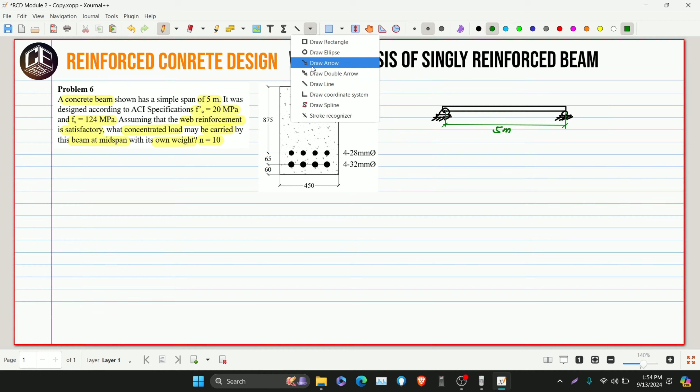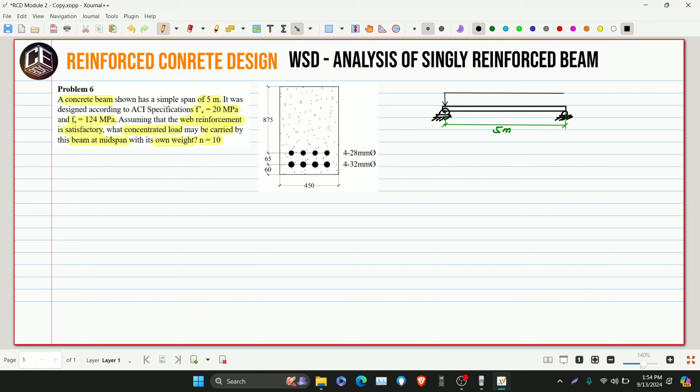Then we have our own weight, which is a distributed load. There's also a concentrated load applied at the center. So this is our load, let's say this load is load P. And this is our W naught, which is the weight of the beam. Let's say this is point A and this is point B.

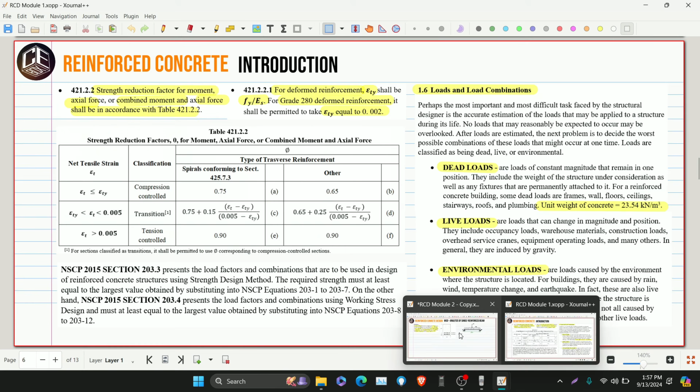So let's get our W naught. If we go back to our module 1, the introduction of reinforced concrete, the unit weight of our reinforced concrete is 23.54 kilonewton per meter cube, so that's what we'll use. Others use exactly 24, so it seems they also rounded off.

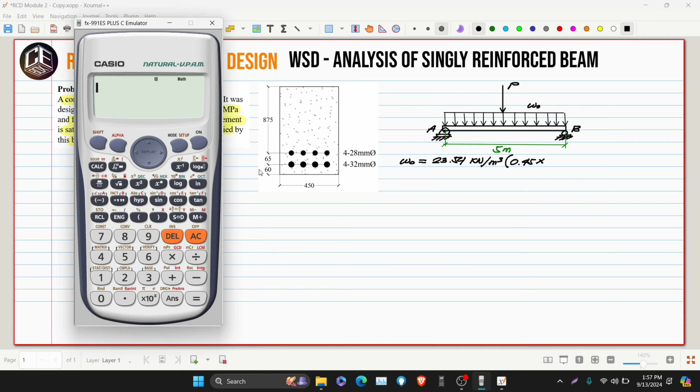Our W naught needs to be in kilonewton per meter, so we need to multiply it by the area, the cross-sectional area of our beam. So our cross-section is 0.45 by, let's see, the overall depth: 0.875 plus 0.065 plus 0.06, so this is 1 meter. This is meter squared since it's area, cancel the meter squared, so what's left is meter.

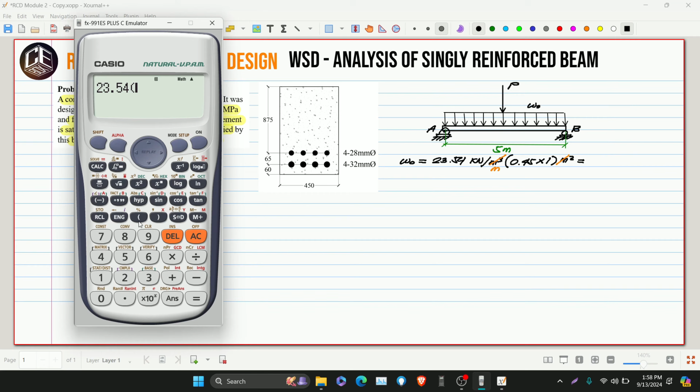So this is 23.54 multiplied by 0.45 times 1, giving 10.593, or 10.59 kilonewton per meter. So now we have our W naught.

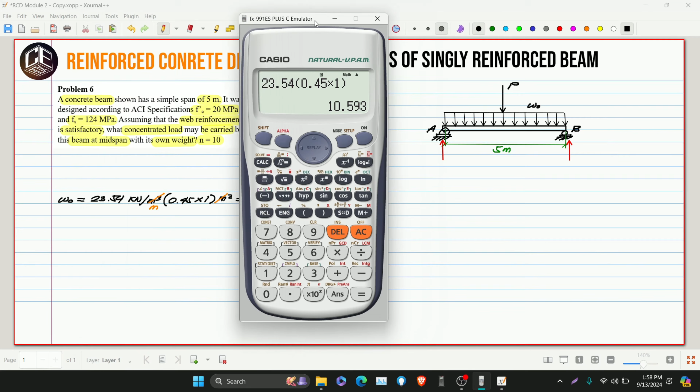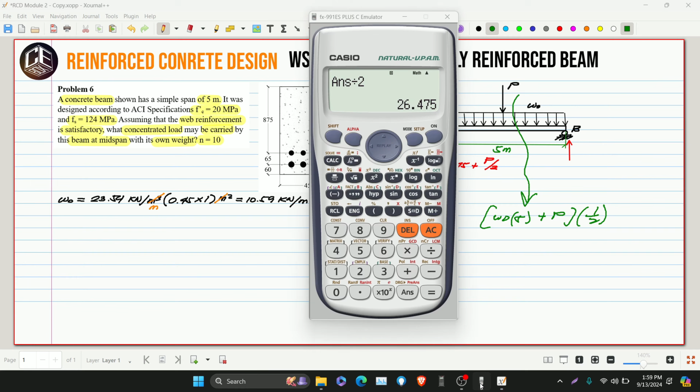That is W naught, 10.593 or 10.59, multiplied by 5, that's our total resultant. Then divide by 2, so our reaction is 26.475 plus P over 2. Because the total result is W naught multiplied by 5 meters then plus P, then divided by 2, so that's correct, giving P over 2. That's our reaction.

Now that we have the reaction, we can get the shear and moment diagram of the beam. For shear, our reaction here is 24.475 plus P over 2, then minus, okay this is at the center, so L over 2, that is 2.5. Sorry, 26.475, that's it.

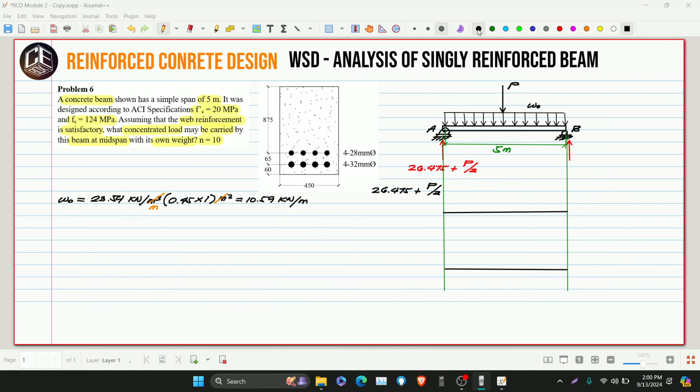So 26.475 then minus W naught, which is 10.59 multiplied by 2.5 meters, so that's 0. So this is it. Then minus W naught, the whole thing, minus W naught multiplied by 2.5, so these just cancel out.

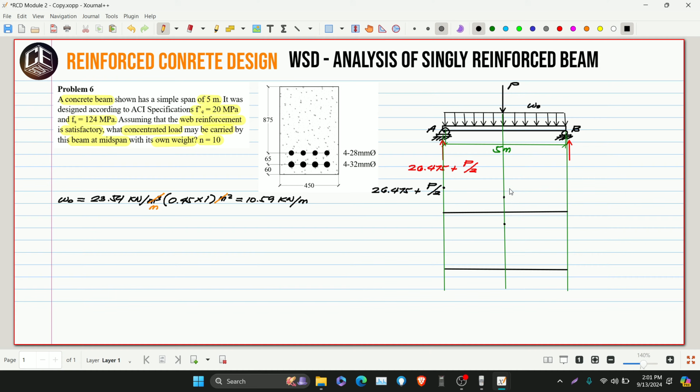Then what's left for us is P over 2. Where is P over 2? At the center. So P over 2, then P over 2, that is 0.5, then minus P, so that's 1, so that is negative 0.5. So this is P over 2, and this is negative P over 2.

And negative P over 2 minus W naught, 10.59, negative 10.59 multiplied by 2.5. So our answer here is negative 26.475 minus P over 2. That's part of the equation too. What happens here? Then minus W naught multiplied by 2.5, the answer is negative 26.475 minus P over 2. That's our answer here. So let's open this up, make it a negative sign.

Negative 26.475 minus P over 2 plus the reaction at support B. So, our shear diagram will close.

This is 0 degree to first degree. Then it goes down, 0 degree to first degree.

Now, what about our moment? We'll simply use the area method. We need to get this area, which is a trapezoid. So this is 1/2 of...

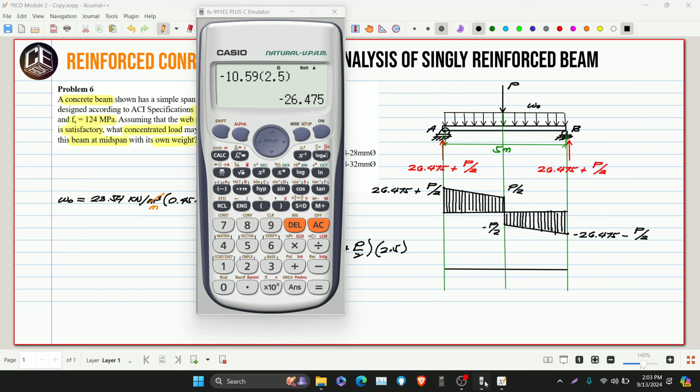26.475 plus P over 2, then plus P over 2, multiplied by 2.5. That's our area. So this is 2.5 times 26.475 over 2.

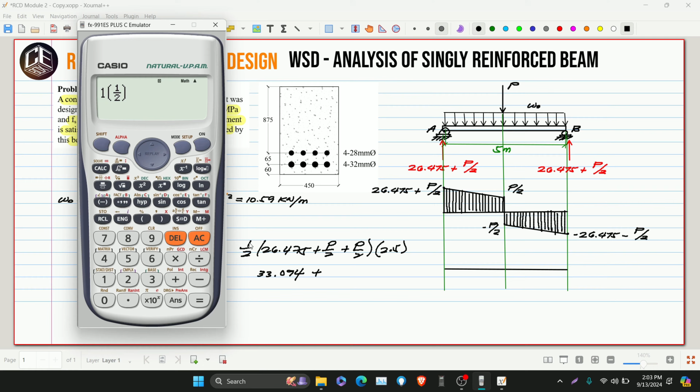So this is 33.094. Then plus P over 2 plus P over 2 is 1 multiplied by 1/2, then multiplied by 2.5. So this is 1.25 of P. This is our moment at the middle.

Then it's the same, right? 33.094 plus 1.25 minus this area. They're equal, so our moment diagram will close.

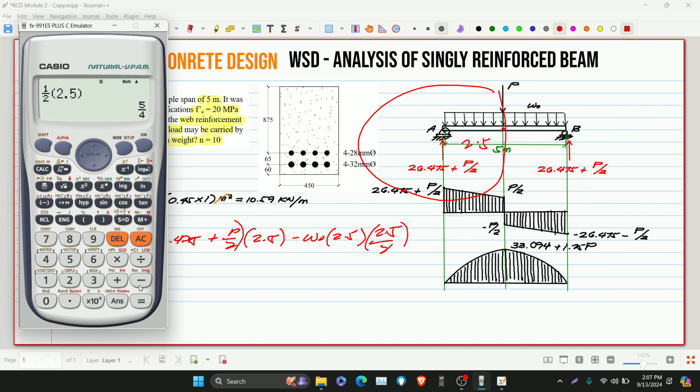Same, right? Now how about our P over 2? P over 2 is 1/2 of 2.5, that is 1.25 P. So it's okay whichever method you use between the two.

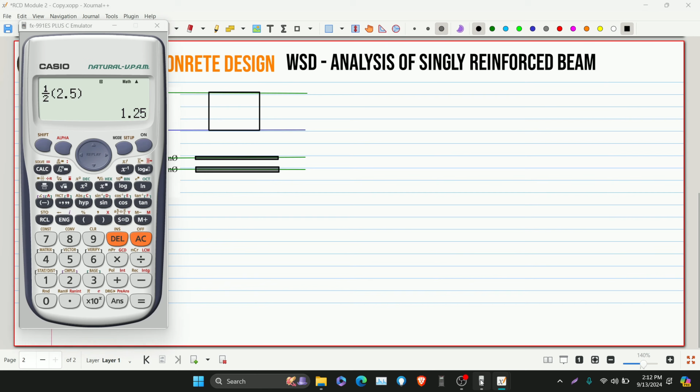So our AS1 is 4 bars of 32mm, right? So 32 squared over 4 multiplied by 4. So this is 1024 pi.

Millimeter squared. Then the other one is 4 bars of 28mm. So 784 pi millimeter squared.

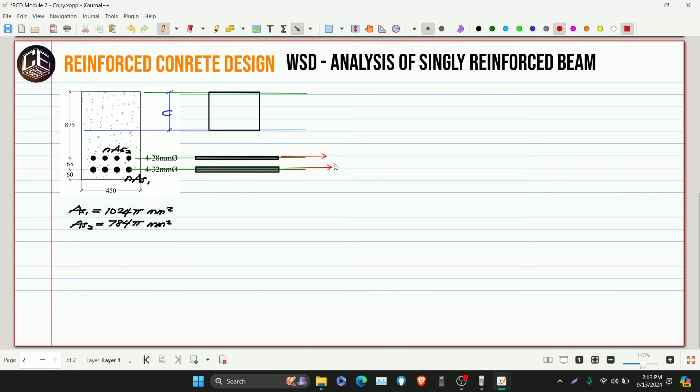Let's put in the parameters. So this is C. Then let's also put the forces. This one for AS2, this one for AS1. Then for the concrete.

Yan. So C, gawin natin itong T2. Ito naman T1.

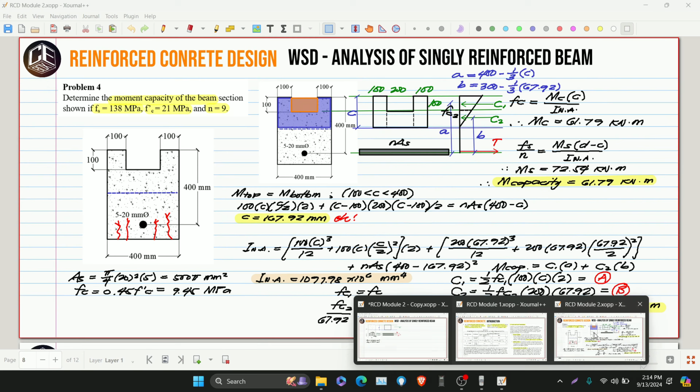So anong napapansin nyo sa ating mga forces? Kagaya lang din sa ating problem number 4. Ang pinakaiba nga lang nila dito is, sa problem number 4, dalawa yung ating compressive force. Sa problem number 6, ang dalawa naman is yung tensile force. Kaya halos parehas lang din naman to. So dito, meron tayong dalawang moment arm, para sa T2, and then para naman sa T1.

So let's say this is distance A and this is distance B. So makukuha lang natin itong mga to kapag nakuha na natin yung ating C, by what method? Moment of area. So M top is equivalent to M bottom.

So this is 450. So 450 multiplied by C over 2. Then equivalent to NAS2 multiplied by, okay, so this is 875, no? So 875 minus C. Then plus NAS1 multiplied by 875 plus 65, ilan yun? So this is 940. Then minus C. Okay, ibabawas natin yung C.

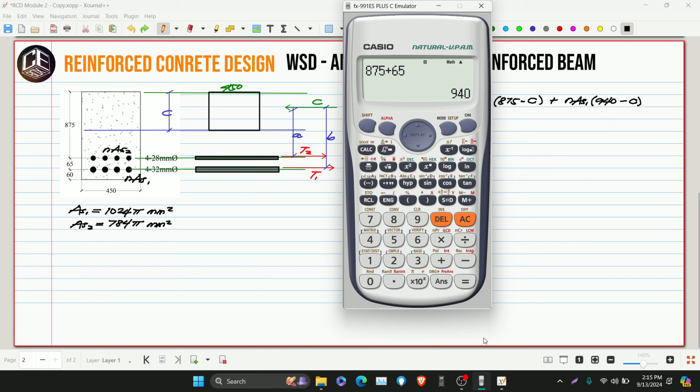So, ano kaya yung value ng C natin? 450 times C squared over 2 is equivalent to N. Ang ating N is 10 times AS2, 784 pi, multiplied by 875 minus C, plus N multiplied by AS1, which is 1024 pi multiplied by 940 minus C. So ang C natin ay 367.88.

So ngayon, kunin na rin natin yung value ng A and B para mamaya madali na lang mag-substitute. So nasan ba ang location ng C? Eh diba ang ating stress dito is triangular? Pag ganyan yung ating stress. So therefore, ang location ng ating C ay nasa 1/3 of the distance C.

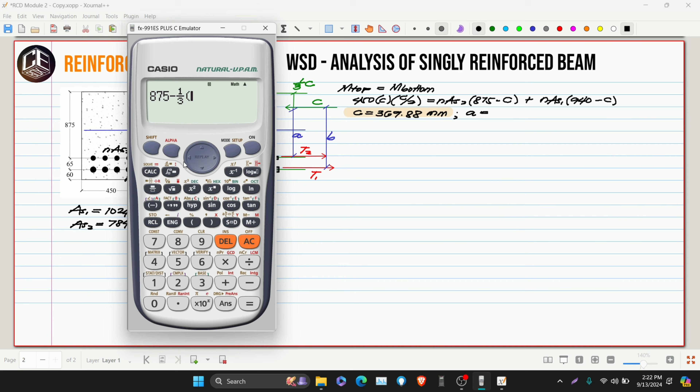So this is 1/3 of C. Kaya yung ating A is equivalent to, okay ano ba to, 875. Ayan, 875 then minus 1/3 of C, which is the value of X in our calculator. So 751.71 millimeters. Then ano kaya ang value ng B?

This is, okay so 875 plus 65, ayan. Then minus 1/3 of X. So this is 816.71.

Now isosolve naman natin yung value ng T1 and T2. Unahin na natin T2 kasi nasa taas. So this is equivalent to AS2 Fs and T1 is equivalent to AS1 Fs. So ito, hindi ko na nilagay na Fs2 and Fs1 kasi isa lang naman din ang given ng ating Fs. So kapag isa lang ang given ng Fs, ibig sabihin, yun na yung stress para sa ating steel reinforcement kahit anoman yung kanilang layer.

Pero meron kasi instances na nag-iiba-iba yung mga ano na yan eh. Iba-iba yung ating Fs, depende sa size, okay, or depende sa materials. Pero syempre, for simplification and design and analysis, and also sa problem solving, isa lang yung ating Fs.

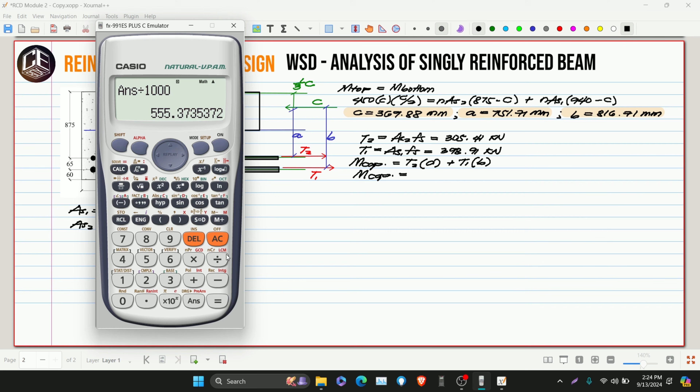398.91 kilonewton. So ang masolve natin na M capacity is equivalent to T2, okay, multiplied by A, plus T1 multiplied by B. So T2, 305.41 multiplied by A na 751.71, then plus 398.91 multiplied by 816.71. Tapos i-divide natin ng 1,000 para maging kilonewton meter. So this is 555.37 kilonewton meter.

Ngayon, yes, hindi pa pala ito M capacity, no? Kasi kailangan pa natin makuha yung ating C. Eh diba, kagaya sa ating problem number 3 to 5, kapag hinahanap natin ng M capacity, kailangan natin makuha yung moment na kayang dalhin ng bakal at moment na kayang dalhin ng concrete. So papalitan natin to, gawin natin tong MS. Yan, ito yung capacity ng bakal. So kunin natin yung capacity naman ng concrete.

So MC, MC is equivalent to C multiplied by, okay, anong kanyang moment arm? Hindi pwedeng A, hindi rin pwedeng B. Hindi nyo rin sila pwedeng i-average. Anong kukunin natin? Dapat makuha natin yung centroids ng ating T1 and T2, dito, no? Kailangan makuha natin yan. Tapos ito na yung magiging moment arm natin.

So, let's say this is distance D1. So, this is D1. So, paano makukuha ang ating centroids? Di ba madali lang naman yan? Kung 60 to, ito 65, kailangan natin mag-Varignon's theorem. Sir, wala po ba siya sa gitna? Wala. Bakit? Kasi, hindi naman sila pantay ng layer.

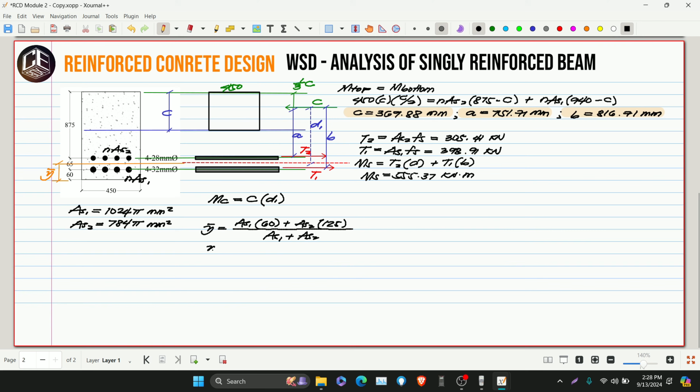So, solve natin yung ating Y-bar. So, AS1 is 1024, no? So, gawin itong alpha A na lang. Then, multiplied by 60 plus alpha B multiplied by 65 plus 60. So, that is 125, then over A plus B. So calc: ang ating AS1 is 1024 pi, ang ating AS2 is 784 pi. So, this is 88.186.

So, masolve na natin yung D1 ngayon. So, this is equivalent to 875 plus 65 plus 60, then minus y bar na 88.186. Then, syempre, ibabawas natin yung 1/3 of C. Ang ating C ay nasa X. So, 788.54.

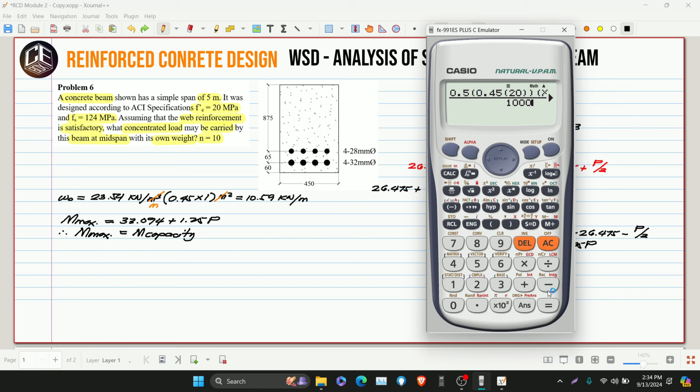Millimeters. Then, kunin natin yung C or yung ating compressive force, which is equivalent to 1/2 of FC multiplied by C multiplied by B. So, ito 1/2 ng ating FC, okay, ang given is F prime C, that is 20. So, 0.45 of 20. Then, multiplied by C, which is X, multiplied by B, which is 450.

Then, divided by 1,000. So, 749 kilo Newton. So, 749 times 788.54. Then, divided by 1,000 para maging kilo Newton meter. So, ito ang ating MC. 590.62 kilo Newton meter. Yan.

So, ngayon, since nasolve na rin naman natin yung y bar natin dito, pwede nyo kasing gawin na yung ating T2 and T1 ay pagsamahin na lang. So, pwede siyang ganito. Yan. Patabain natin ng konti. Yan. Para alam natin na siya ay resultant force. Then, gawin natin, ito ay tension force T.

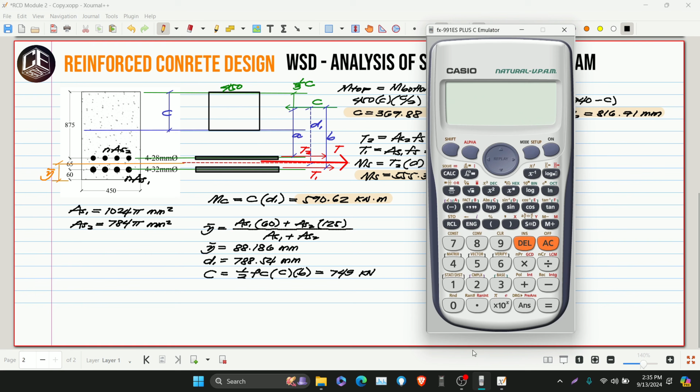So, kunin rin natin yung MS gamit naman yung ating tension force T. So, what is our tension force T? Pinagsamang T1 and T2. So, this is 305.41 plus 398.91. So, 704.32 kilo Newton. So, yung ating MS is equivalent to T, then multiplied by same lang na moment arm, yung ating D1.

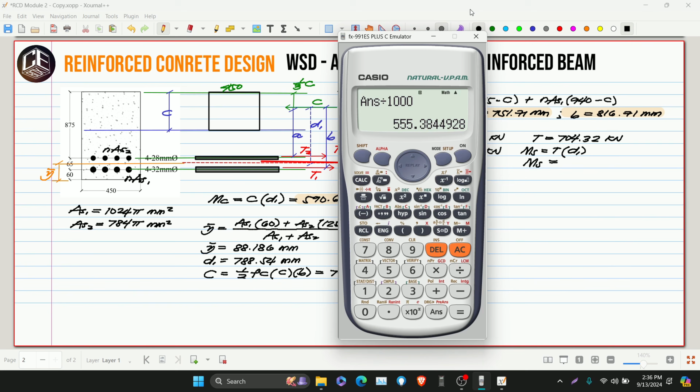So, 704.32 times D1 is 788.54. Then, divided by 1,000. So, same lang ang nakuha natin sagot. 555.38. May discrepancy, pero maliit lang naman, di ba?

Ayan. Ngayon, meron na tayong MS and MC. So, kukunin natin yung pinakamaliit para yun ang ating gagawing M capacity. So, ang ating M capacity is equivalent to 555.37. So, ang nag-govern na capacity ay nanggaling sa mismong bakal. Mahina siya compared sa ating concrete.

Yan. So, since meron tayong M capacity, makukuha na natin ngayon yung value ng ating P. So, copy na lang natin to. Yan. So, this is 555.37 is equivalent to 33.094 then plus 1.25 of, so ang ating P is in kilonewton. 555.37, then, i-minus natin yung 33.094, tapos, i-divide natin ng 1.25. So, this is in kilonewton.

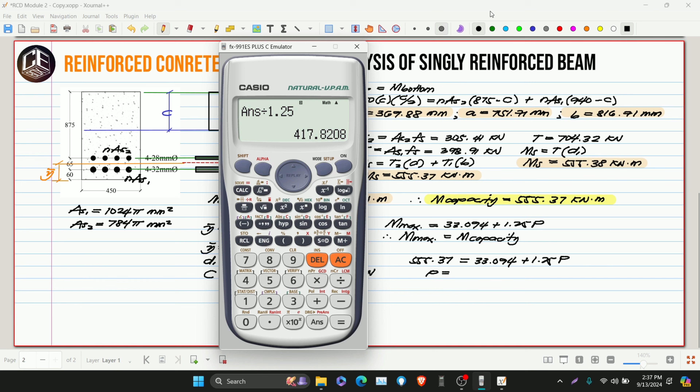417.82 kilo Newton. So, kapag ang ginamit nyo naman ay 590.62, mas malaki yung makukuha natin na P. Na kung saan, kapag mas malaki ating nakuhang P at kinuha nyo yung moment, mag-fail yung ating bakal. Kaya hindi namin pwedeng gamitin itong 590.62. Okay?

Ayan. So, medyo naging mahaba lang ating solution sa number 6 kasi dito sa partition na to, di ba? Pero ito napaka-basic lang, di ba? This is under lang ng strength of materials, shear and moment diagram. Pero kung ayaw nyo nga mag-shear and moment diagram, edi pwede na kayong mag-moment at specific point, kung alam niyo kung nasaan ang location ng maximum moment. Tapos yan, ito, pares na pares lang ng concept ng ating problem number 4. Ang pinagkaiba nga lang, ang dalawang force na nandito ay galing sa mismong mga bakal. Pero same na same pa rin naman ang concept natin.

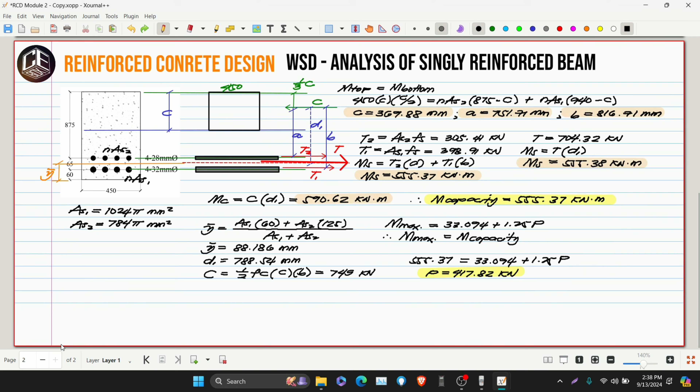So this is our problem number 6 for reinforced concrete design, WSD, analysis of singly reinforced beam.